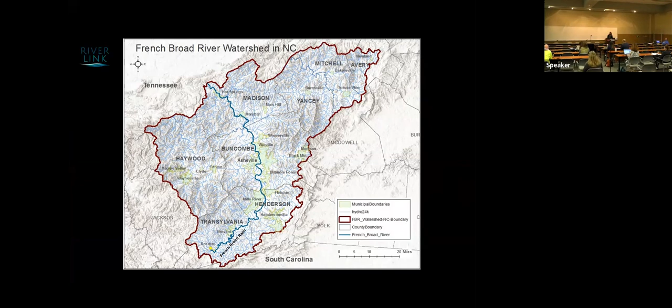A little bit about RiverLink. We're an environmental nonprofit based in Asheville, North Carolina, and our mission is to promote the environmental and economic vitality of the French Broad River Watershed. This is the French Broad River Watershed in North Carolina. It's an 8-county region, and our home base is in Asheville. Most of our work happens in Buncombe County, but technically the French Broad River Watershed is our geographical area of focus.

After a year-long watershed study, we completed the restoration plan in August 2020. There are multiple reasons why RiverLink and our partners decided to focus on this particular watershed in Asheville. There are 3 tributary streams of the French Broad River that flow through this watershed, and they had known water quality issues, including fecal coliform bacteria and other legacy pollutants left over from the industry that used to be built up along the French Broad River.

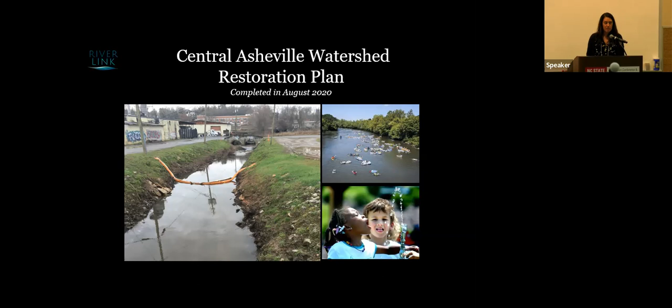So a lot of water quality issues, and marginalized communities that deserve better. We set out to develop this plan to address some of these issues plaguing this area in Asheville.

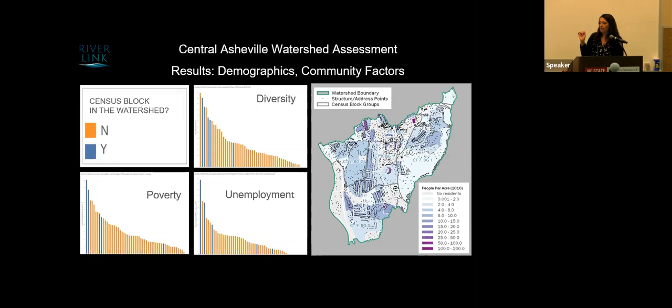So we took that into consideration when developing our project goals. In addition to the typical goal of creating a 9-element watershed restoration plan, we also wanted to really consider the impact of the restoration plan on these underserved communities.

In order to do that, we set out to gather as much community input as we could. We also wanted to help connect communities to the watershed and develop an appreciation of the water resources that most communities are disconnected from. We also wanted to explore green job training opportunities—due to the high levels of unemployment in this watershed, we thought this could be a great opportunity to help with implementation of the plan, and to build a coalition to help us implement it.

So for community input, we did a variety of things. We created a community survey to gather residents' concerns and to learn more about runoff and flooding issues that may be occurring in their neighborhoods. We wanted to reduce the barrier to participation in these surveys, particularly for marginalized communities.

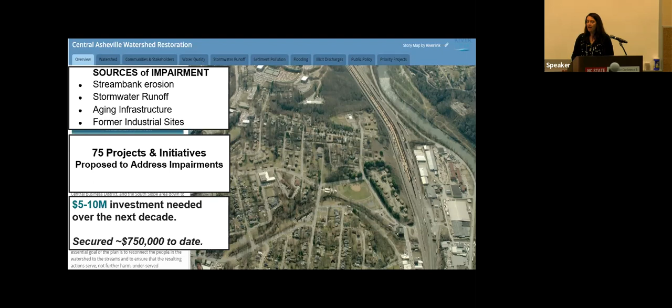After a year-long watershed assessment and community engagement process, we developed the Central Asheville Watershed Restoration Plan. This effort was led by BlueEarth Planning and Engineering. We identified typical sources of impairment in an urban watershed, really nothing surprising there. Out of the plan came 75 projects and initiatives proposed to address these impairments, and we estimate between $5 and $10 million is needed to be invested over the next decade to slow down the degradation of the streams and improve water quality and the ecology of this watershed.

To date, we've secured around $750,000 to implement projects. And if you'd like to explore this watershed plan in greater detail, it lives as an interactive web app on RiverLink's website.

So now I'm going to talk about some of the projects that came out of the plan that are being implemented. I'm not going to go into great detail about each project, but I encourage you to stick around, because my colleagues who are working on implementing these projects are also presenting during this session and the next, and they'll go into greater detail about each of the projects I'm going to discuss.

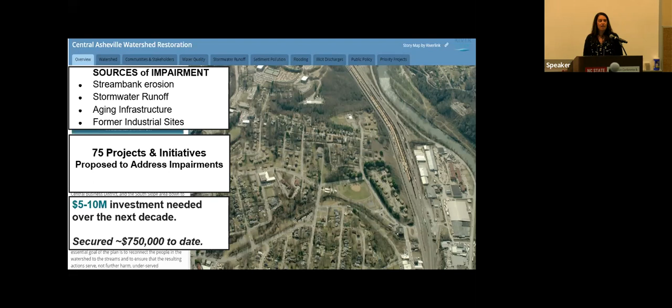So first up is the Southside Community Stormwater Project. As I may have mentioned earlier, the Southside community is in the Central Asheville watershed. It's a historic African-American community that was heavily impacted by the urban renewal program in the 1970s. A lot of Black homeowners and business people lost their homes and businesses under the guise of improving our urban areas.

Many of them were moved into public housing and still live there today. The goals of this project were to improve water quality and habitat in a stream that the community refers to as Nasty Branch, but also address community needs to the extent possible. They're having some runoff issues at a public housing community there in the Southside neighborhood.

One of the goals was to address those runoff issues and then continue building those community partnerships. We were told by residents during our community engagement process for the watershed plan: if you want our input, you need to communicate with us often, communicate clearly, and whatever you do, don't overpromise. People in this community, rightly so, are skeptical of outsiders coming in and saying they're going to make improvements to their community, and it hasn't always gone well for them. So we really tried to keep this advice at the back of our mind.

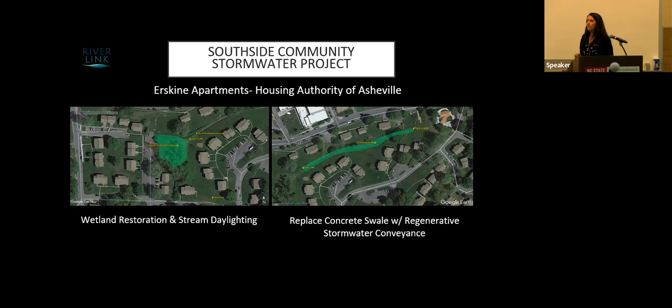In addition to the water quality improvements we were focused on, we also wanted to help address community needs if at all possible. So we looked for areas where our project might overlap amenities that the community wants and needs, if at all possible. Through our stakeholder engagement events, we heard from residents that there's a need for safe walking paths to better connect the apartment buildings to one another. Currently they're dirt paths, and a walking path could directly connect them to their community center, which is across the street from the apartment complex.

We also want to remove a chain link fence that currently bisects the apartment complex and prevents people from moving in a more direct way to one another's apartment buildings. There's nowhere to hang out in the shade, so we're going to construct a shade structure, a safe bike path for kids, a memorial to lost loved ones, and edible plants. We've gotten a foundation grant through the Dogwood Health Trust Fund that's going to help fund the community amenities aspect of the project.

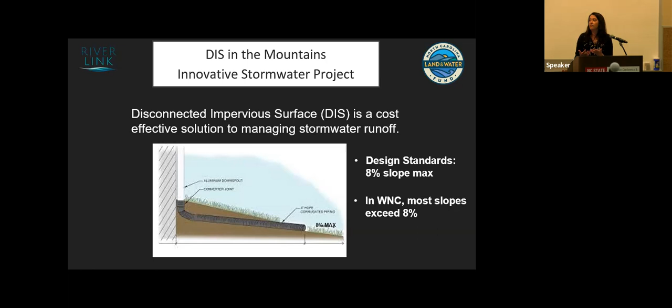That really limits our ability in Western North Carolina to utilize this cost-effective way of dealing with runoff. So this project's goal is to develop designs for DIS on steep slopes - we were looking for slopes greater than 8% - and then research the effectiveness of these designs once the features are constructed. So looking at things like how often do they overflow, what are the infiltration rates like, and then obviously looking for any issues like erosion, since these are being built on steeper slopes.

A really cool aspect of the project is there's a social research component. We're partnering with faculty and a student from Lenoir Rhyne University's Graduate Studies program in Asheville to look at public perceptions of stormwater management. They're going to present on that after my talk, so I encourage you to stick around if you want to learn more about that.

So what have we done so far? We worked with 6 homeowners in the Central Asheville watershed to construct DIS practices on their property. These properties have slopes ranging between 17 and 33%, and they're designed for the 1.5-inch storm. We're very early in the monitoring process, but early results show good infiltration.

This photo was taken in October when they were installed - there are dormant native grasses and wildflowers planted in there. You wouldn't know it by looking at it, but this spring we're really excited to see those plants flush out, and the monitoring will continue. So stay tuned for more information on this.

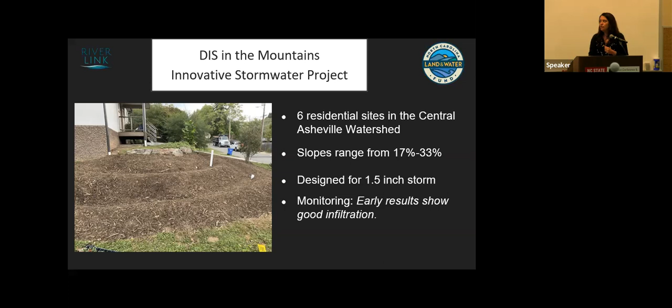And with that, I would like to thank all of our partners and funders. I forgot to mention that the Southside Community Stormwater Project is primarily funded by the Division of Water Resources, the Water Resources Development Grant, as well as the North Carolina Attorney General Environmental Enhancement Grant.

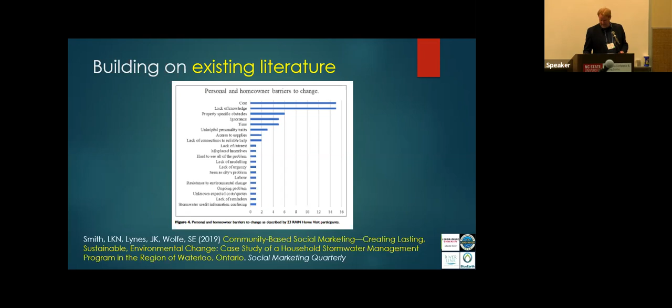We referenced and looked at lots of literature as we went along. One particular study I want to mention is by Kristan Cockerill from Appalachian State University, who does a whole lot of work on stormwater perception. She did a presentation at the Western Piedmont Council of Governments Water Quality Conference along with the Reese Institute last November.

I'm going to share a little bit about some of her findings to connect them with what we're doing. When she asked the question, what does the public think about stormwater, first of all, this isn't a widely studied area. Second, it's complex. And third, context matters critically.

They looked at a very wide-ranging area of Appalachian Mountain communities from New York down to Georgia, with 1,400 respondents, which is much bigger than our sample. So it's good to look back and forth at what they found, and the context of the Central Asheville watershed becomes really critical for what we were looking at.

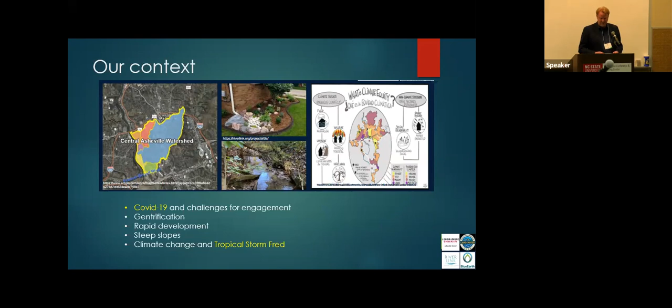COVID-19 is still among us, but it created a challenge for going door to door as we wanted to in some ways, and changed the rules of engagement in a lot of ways. Also, right in the middle of data collection, Tropical Storm Fred hit, and that actually gave us a little bump in people being interested in stormwater issues because they were hearing a lot more about it in the media.

The other thing I want to mention about the context is there's a climate justice and climate equity initiative that the city of Asheville has been engaging in, happening in parallel to what we're doing. We could simultaneously learn from what they're doing and not duplicate it, but they were having a lot of community meetings around what is happening in your community and what we can do about that.

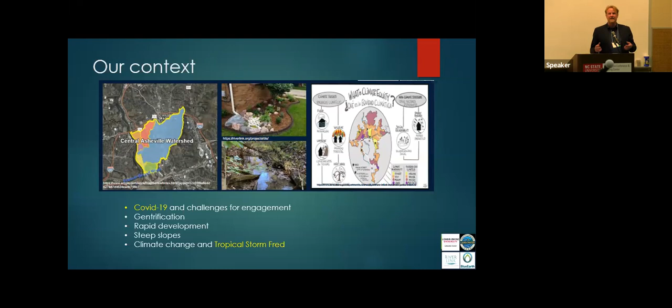Our process involved connecting this to multiple classes that I teach. One is called Environmental Policy. Another is Visions of Sustainable Communities. And another, happening this semester, is Sustainability, Behavior, Education, and Communication.

In these classes, students have been involved in almost all aspects. But more importantly, Reese Fellows, such as Allison, who has done the most of the work here, have been involved in making what we've done what it is right now.

We conducted 15 interviews last spring with community leaders engaged in the community, and they not only told us about what they cared about, but also about how to engage the community more effectively. So it's kind of a strategizing set of interviews.

We also conducted a survey which aimed to tap knowledge, awareness, context, the perceived barriers and benefits that I mentioned, interests people have, and potential action steps. And I'm going to turn things over to Allison Royer, who's going to tell you all about that.

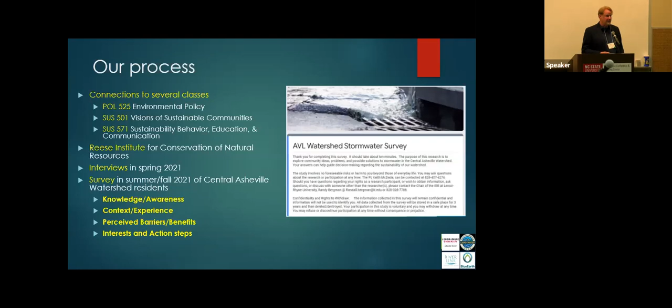So thank you. I'll be back.

We faced several challenges conducting this survey, including reaching a diverse group and getting people interested enough to take the time to complete it. To combat these challenges, we reached out to groups with different backgrounds and offered the survey in Spanish, as well as offering an incentive of raffling off a free rain barrel for anyone who completed the survey. We finished with 87 completed surveys in total to analyze.

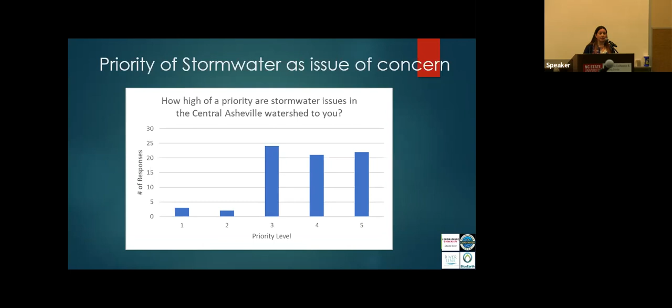When asked how high of a priority are stormwater issues to you in the Central Asheville watershed, the majority of our respondents responded with a priority of 3 or higher. This could show that our sample has a bias for caring about these stormwater issues, which could show that we are engaging these innovators and early adopters according to this diffusion of innovation model developed by Everett Rogers.

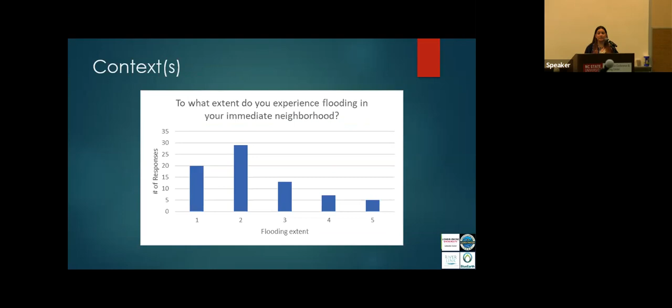When asked to what extent do you experience flooding in your immediate neighborhood, the majority of our respondents marked that they experience flooding to a small extent of 1 or 2. This could mean that flooding happens more downstream from these respondents, and could show that our sample's perception is influenced by a lack of flooding in their immediate surroundings.

Similarly, the majority of our respondents responded that they have 50% or more of their property uncovered by hard, impenetrable surfaces, meaning that there's lots of opportunity for water to soak through the ground on their properties, and also lots of opportunity for DIS to be installed.

When given the chance to respond to a question regarding flooding problems, neighbors were mentioned several times, whether it was water flowing to or from your neighbor's yard, or your yard being fine while your neighbor's property floods. We also found it interesting that several people mentioned puddles that slowly soak through the ground as a problem, when this could actually be seen as a positive thing when done intentionally through DIS.

So clearly our sample has some knowledge of the problems and the causes of stormwater management, but there may be a knowledge gap in the solutions to these problems, such as how to slow it down, soak it up, and keep it clean properly. Keith is now going to explore some of the more specific barriers and benefits from the survey.

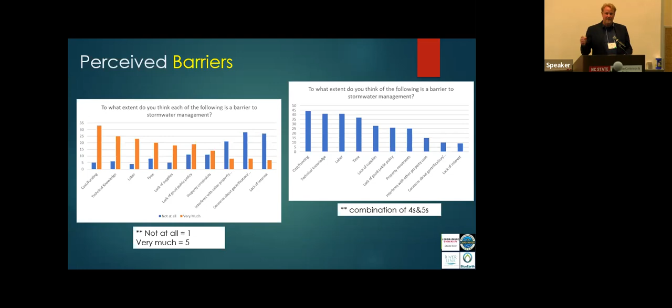So what do you think the perceived barriers are? I already mentioned a few. Similar to the Waterloo, Ontario study, we found that cost and lack of knowledge were the most rated barriers to engaging in these behaviors. And that's really critical because, as Allison mentioned, there's knowledge about the problem, but not knowledge about what to do about the problem. People also did mention labor and time as important factors, and they also really pointed out that it's not the lack of interest that is keeping them from doing this, if you see the far end of that.

We also asked if there are other barriers that people perceive that we didn't list from all of our preparation in developing our survey, and there are two things that I want to point out here.

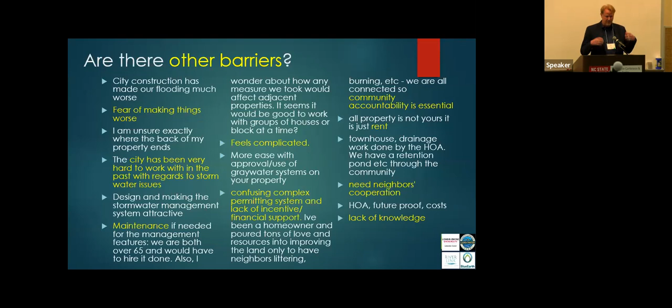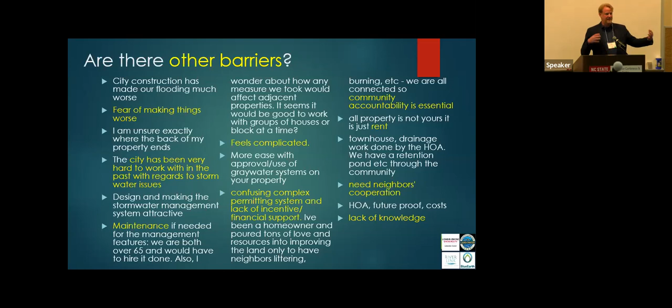There was a pattern of people who were worried about making things worse - not wanting to do something that messes things up. There was also a pattern of responses about working with neighbors in a cooperative way, since they needed assistance because these issues transcend boundary lines. Those were important to recognize and consider.

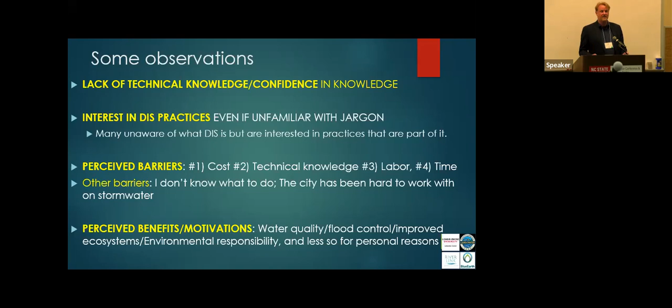So we've got a lack of technical knowledge, or a lack of confidence in the knowledge of what to do, but yet a really strong interest in DIS practices, even without knowing what DIS is. These perceived barriers of cost and technical knowledge, and not knowing what to do, combined with - for early adopters at least - recognizing that people want to take responsible action and protect their water quality.

We also asked about perceived responsibility - who is responsible for managing stormwater practices on private property? What's interesting here is city government and county government got a slightly higher number of respondents saying that's who is responsible. But it turns out most folks said, well, it's us, myself. If you look at the third from the left there - myself, my neighbors, businesses - we're all almost equally responsible for this. The funny thing is nonprofits got the lowest ranking here, yet they're doing the most. That's something to consider.

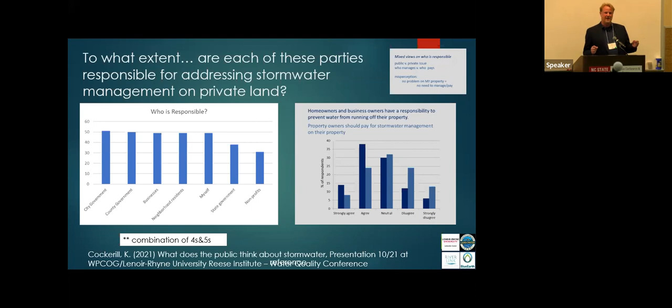Adding on to this - connecting back to Kristen Cockerill's work - she looked at a similar question and found that residents thought residents and businesses were responsible, but also found an additional factor: they weren't equally responsible for paying for it. They were only responsible for doing it. So there's this mismatch between who's responsible for paying and who's responsible for doing. That's a conundrum - something we essentially explored and are considering.

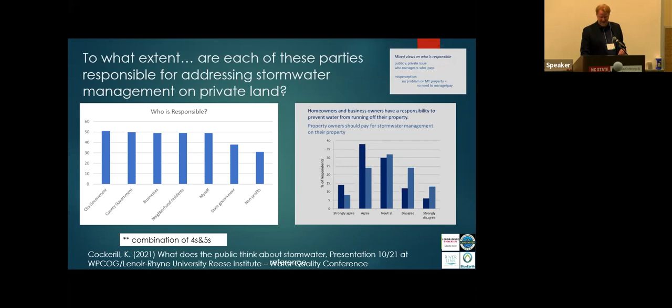In general, there's a perceived responsibility, there's perceived cooperation. Since there's this rather equal sense of responsibility across the various parties, this could mean there's a perceived sense of shared responsibility when it comes to stormwater management. This plus the responses regarding neighbor relations could suggest there's a perceived need of cooperation among groups in order to properly manage these problems. According to our sample, there's not a lack of interest, but rather a lack of knowledge about solutions and how to properly work together across property lines.

So even though it's clear that more knowledge is needed among the community regarding DIS, it is well established among conservation research that knowledge alone will not lead to action. So we will need to do more than just share information.

We are currently using awareness of diffusion of innovation processes by having those six test sites that Renee mentioned, and we held a workshop at one of these test sites to show the community what is happening here. These workshops also open the door for a community influencer to emerge, and increase the observability of these DIS projects by diffusing the idea throughout these neighborhoods and showing the relative advantage of these installations. There's also the potential to create new social norms, which could lead to a new paradigm of human stormwater ecosystems as the ultimate goal.

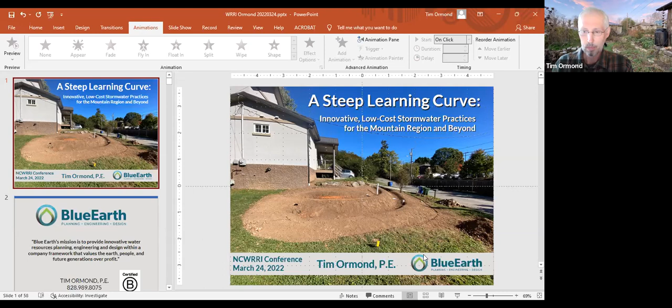I have funding to do CBSM on this topic and we need to collaborate on this. So it's more of a comment. And I should have realized that already had I looked at your outline as one of your session people. I know Marshall's going to get me, but I'm excited about that. So I didn't know you were doing CBSM. Awesome.

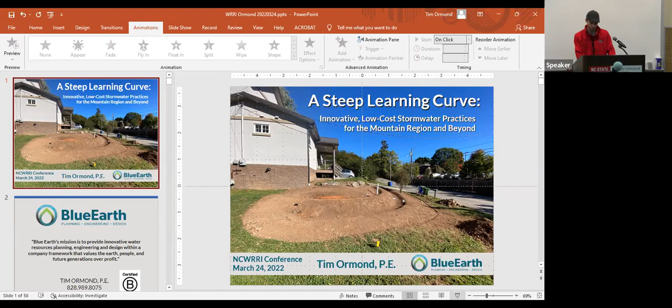Okay, can people hear me? Yeah, sounds good. All right, terrific. Well, thank you. Glad to be here with you all in the form of a hologram. I've never done this before.

I'd like to talk about the innovative stormwater green infrastructure project that Renee referred to called DIS in the Mountains. A quick plug for our company, BlueEarth. We're based in downtown Asheville. We do water resources planning and engineering. We're a mission-driven company, and I think we're the first certified B Corporation in North Carolina that's an engineering firm. There's only a handful around the country.

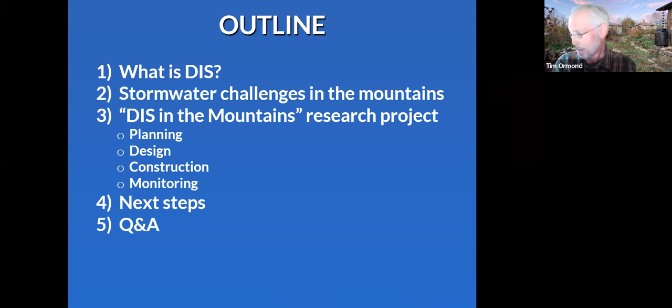So you've heard what DIS is, but I'm still going to mention it, then talk about stormwater challenges in the mountains, our research project, the planning, design, construction, monitoring, next steps, and then have some Q&A. Just setting my timer. So what is DIS? You probably already know that, but it's one more acronym you can add to your collection.

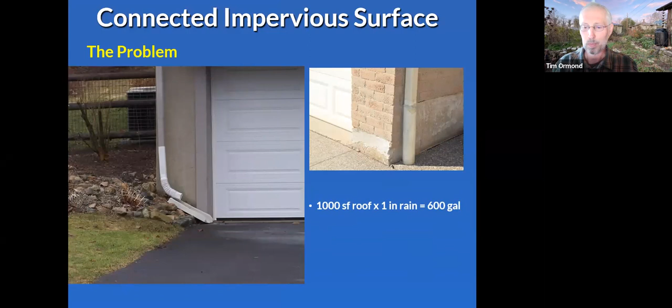It stands for Disconnected Impervious Surface. And the problem is connected impervious surface. So this shows an example of a downspout that's piped to a driveway that goes to a street and a storm sewer system, and then into a creek. Though it may seem like a minor issue, if you take a 1,000 square foot roof, 1 inch of rain,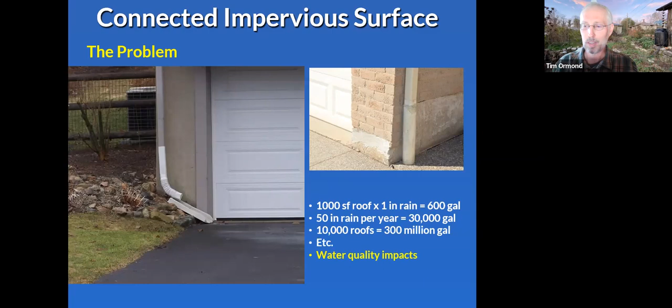you end up with 600 gallons. If you had 50 inches of rain a year, you're dealing with 30,000 gallons. A community with 10,000 roofs, 300 million gallons, etc., like the old shampoo commercials. And when you think about the water quality impacts, they can be very significant when you accumulate that.

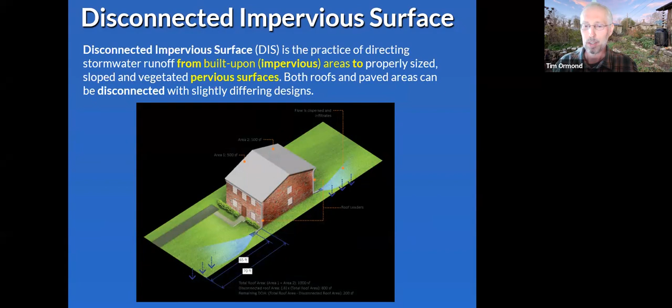So DIS has been mentioned before. This is the long definition, but it's essentially just taking runoff from impervious areas and redirecting it to vegetated pervious areas for infiltration. Fortunately, it's already in the state stormwater manual. It's a low-cost, simple practice. It can be done at the residential scale, DIY, and it has potential widespread application.

And that's really why we're interested in this—we think it's something that, when you accumulate the effect, can really have a great positive impact. Renee showed this diagram already, but essentially you're disconnecting your downspout and redirecting it to a vegetated area. But there are site constraints.

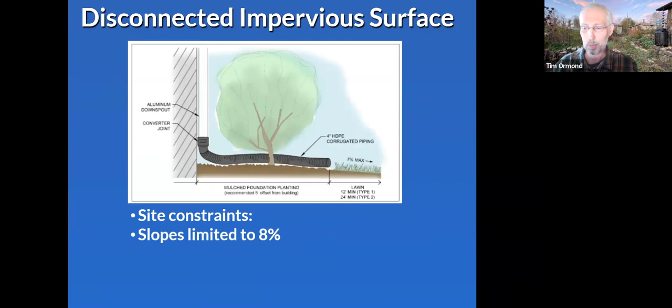Slopes are limited to 8%, unless you have highly pervious soils, then you can increase it. You need sufficient vegetated area for infiltration. And of course, there are limited options in the mountain region.

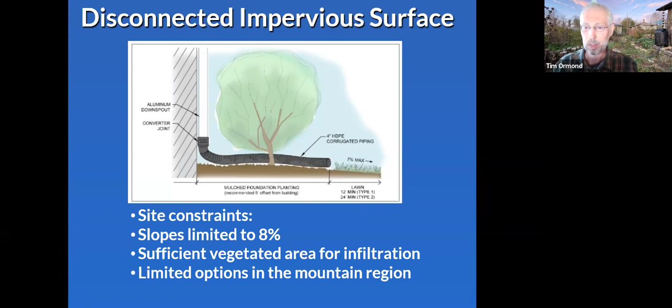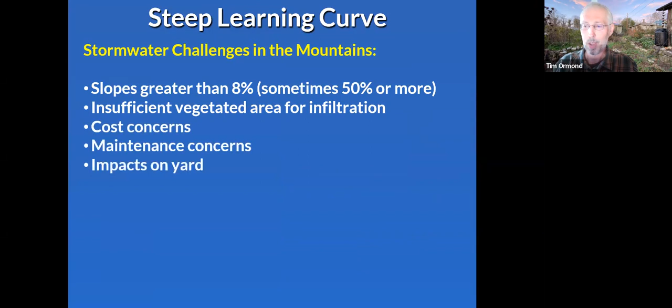So stormwater constraints in the mountains, or challenges—some of them are pretty obvious, in that most of our slopes are greater than 8%. It's hard sometimes to find slopes 8% or less. In fact, we have some sites that are 50% or more. There's insufficient vegetated area for infiltration, cost concerns, maintenance concerns, impacts on yard usability. And it's really not a high priority unless you have some kind of existing problem like a slope failure or flooding.

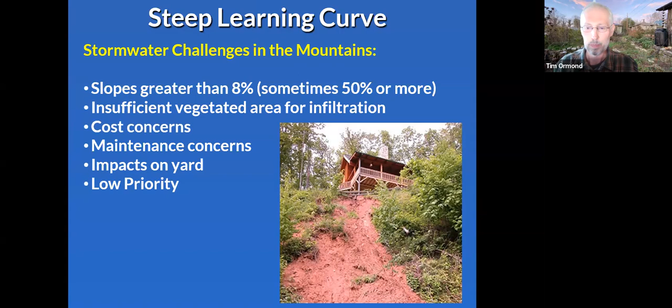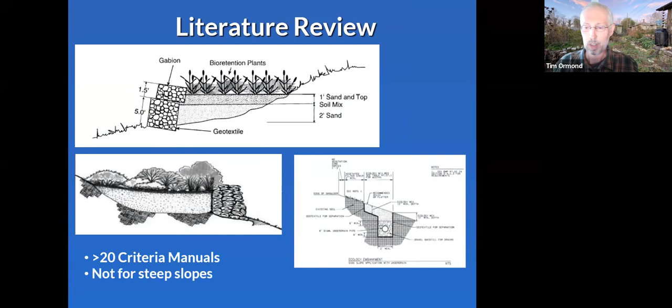We did a literature review looking at different stormwater manuals, over 20 different manuals, and you won't find many stormwater practices for steep slopes unless they involve some special technique such as a retaining wall system.

That piqued my interest about 10 years ago, and I embarked on this research project in Mars Hill, about 20 minutes north of Asheville, the Steep Slope Bioretention Pilot Project, and designed two different terrace bioretention systems using segmental block wall and gabions. We worked with Mars Hill University to do monitoring.

It was a successful research project, but as you can imagine, the cost is fairly high once you're dealing with structures like retaining walls.

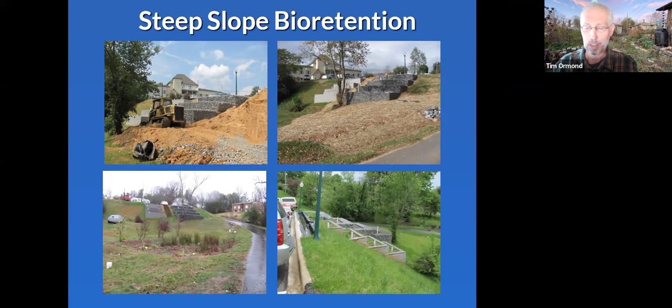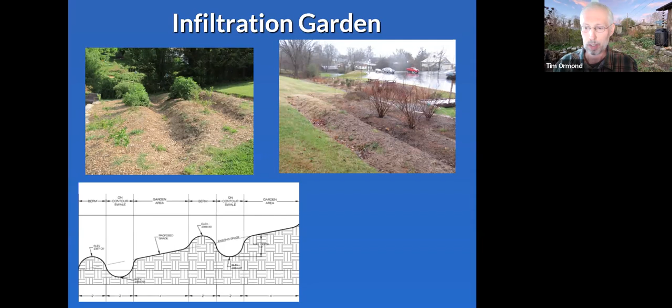We also looked at some simpler, more cost-effective approaches and developed this infiltration garden. It's using permaculture techniques, constructing swales on contour and using the material that's excavated to build berms, basically to intercept the flow coming down a slope. This particular one was on a slope of about 20%.

So I've kind of had this in my back pocket for a number of years. We planted it with elderberries and other native and edible vegetation.

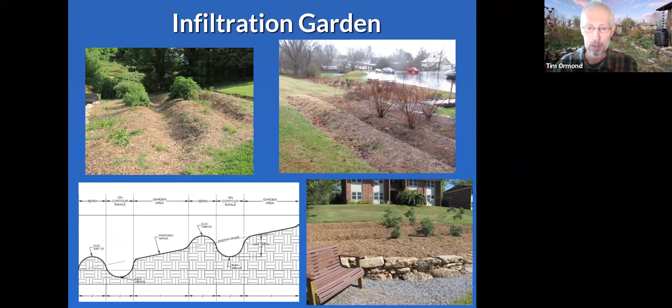And that brings us to the DIS in the Mountains pilot project. The project goal, condensing the words here, was to manage and treat stormwater runoff and then develop DIS techniques for mountain regions, and then, of course, the social research that Keith and Allison just talked about.

I guess you know a lot of this already. It's in the Central Asheville watershed. Our fearless leader has been Renee, RiverLink. Grateful to NC Land and Water Fund and the rest of our team, including Wildlands.

We started with the site selection process, and it started with a remote GIS desktop analysis. We looked at steep slopes and other parameters and narrowed it down to a measly 337 properties, sent out a mailer, got a pretty good response, I think greater than 10%.

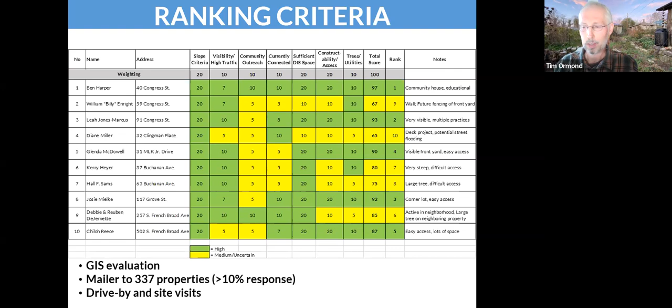Then Renee and I did some drive-bys and site visits. We ended up with a lot more interest than we had budget to fund, but we had this criteria matrix, including slopes, high visibility, constructability, and some other factors, and then ranked the top 10 sites. We picked the top 6, and all of them were willing to participate and signed 10-year agreements.

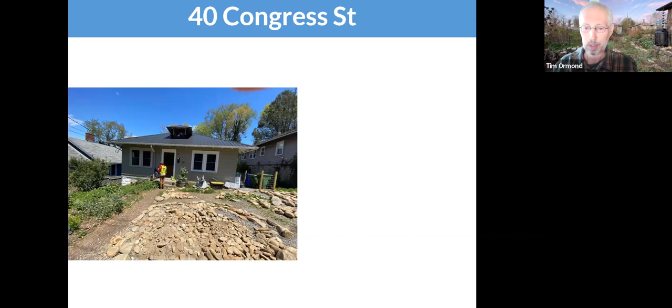I'm going to show you some photos of the different sites. This is an older neighborhood, with homes that were built in the 1920s, some are newer, but basically small lots. Sometimes, runoff goes from one lot to the next.

Here's one site, slope of 33%. This particular site had 3 potential locations. We picked 2 of them. One of them had utility constraints, so we opted not to deal with that.

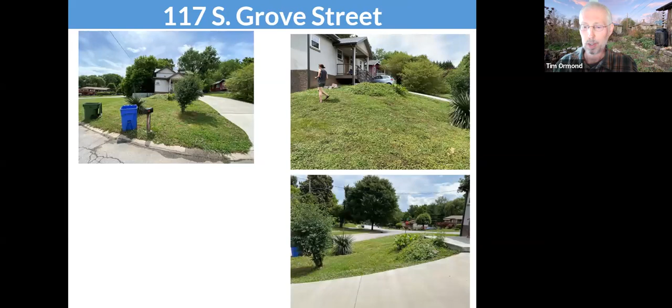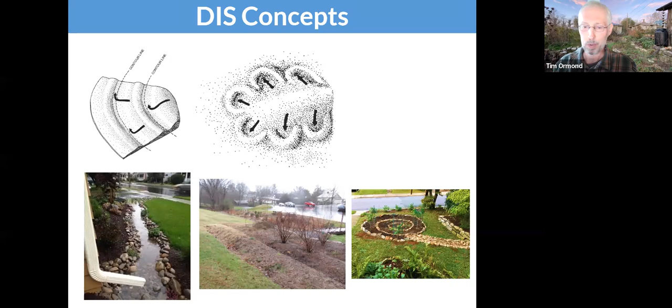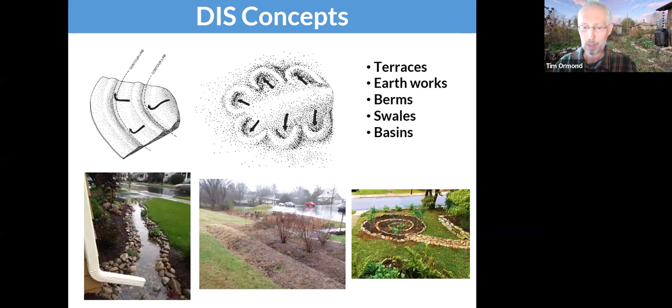So we went through a brainstorming phase, and our drivers were really to come up with reproducible, simple designs. We didn't want to get too complicated. We wanted things that could be effective, but reproducible and even do it yourself. We borrowed from some maybe permaculture thinking in terms of earthworks, which basically means working with the existing earth, doing grading and shaping and using the material on site. From there, we ended up with two basic concept designs: the swale design that I already talked about.

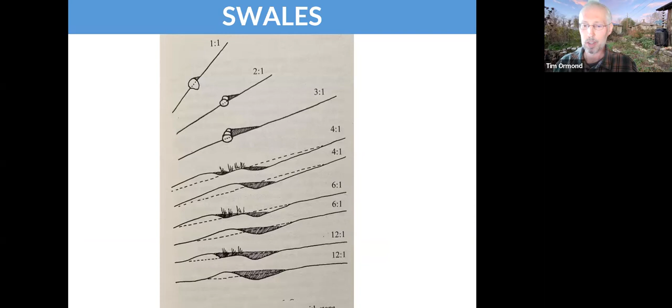And when you get above a slope of greater than about 4:1, you're going to start to need to move into some kind of structural intervention, like a retaining structure or boulders.

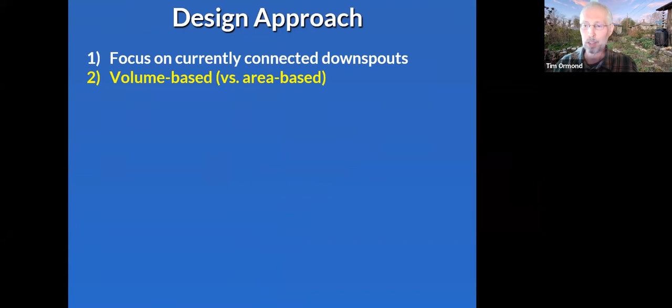So that brings us to design. Some of our key design principles we focused on: currently connected downspouts. This is the biggest one I wanted to bring your attention to, is volume-based versus area-based, and I'll talk a little bit more about this.

As Renee mentioned, our goal was the 1.5 inch storm, because that represents greater than 90% of all storms. And a key constraint is available space.

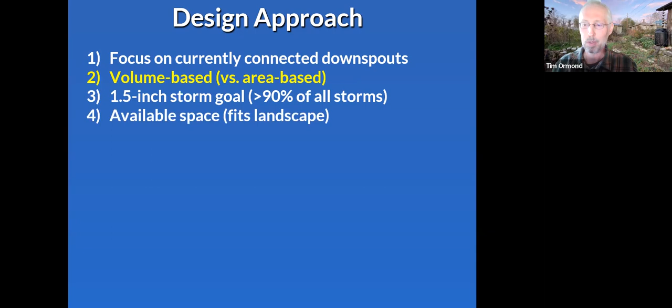We started with a maximum storage depth of 12 inches, but we ended up lower than that. And all of our overflows were through 4-inch diameter PVC risers with atrium grates.

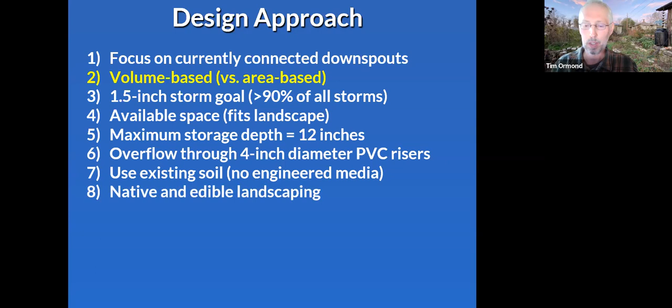We did that because we didn't want to have the risk of spillways, earthen spillways and berms eroding. And this is key as well, is using existing soil, no engineered media. We didn't bring in any underdrain systems, and we worked with native and edible landscaping that was appealing to property owners.

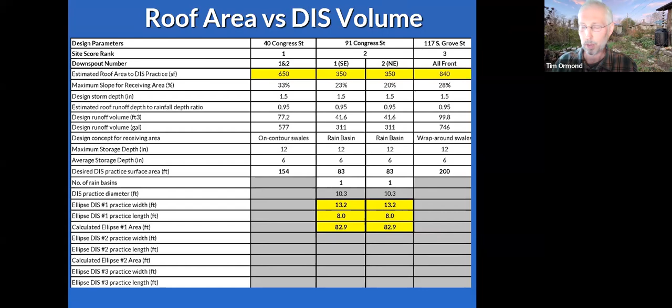This here is just a spreadsheet of sort of the balancing act we had to play. We had the roof areas, the available space, and the volumes we were trying to achieve. And this was one of the tools.

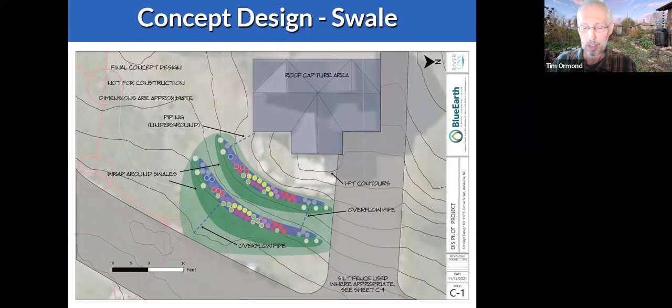From there, we ended up with our concept designs. This is the swale concept design. Basically all the downspouts are piped underground into these swales, and then there's an overflow through the 4-inch riser.

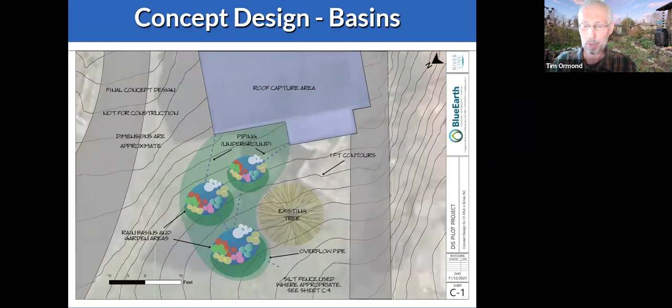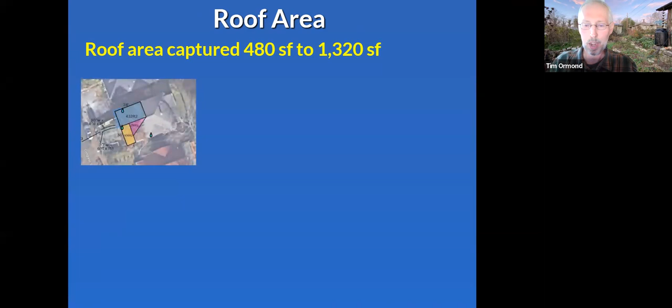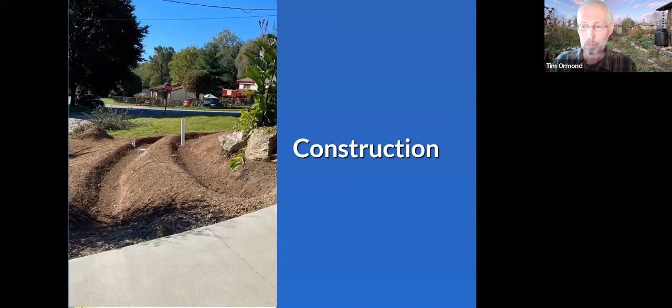That brings us to construction. We constructed a total of 8 rain basins and 4 swales on 6 sites. And the soil was mechanically fluffed, as the contractor called it, to a depth of 12 to 18 inches.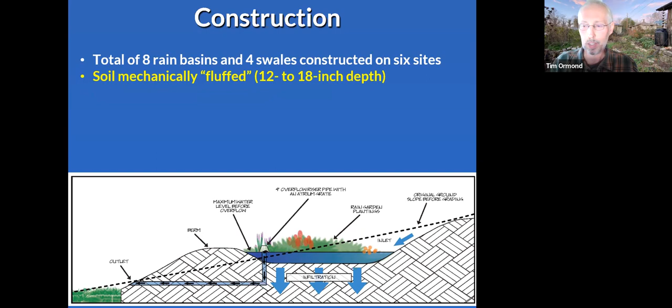And what that showed really is that we could get a lot of infiltration on the site just by working with the existing soil. Total roof area disconnected was over 4,700 square feet.

We compacted earthen berms, and a lot of that was done by hand. And all the downspouts were piped underground. We had a total of 900 plug plants and 14 native plant varieties, a lot of pollinator species.

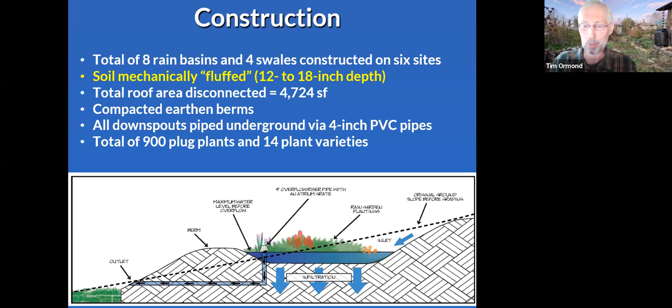We also did some ever-bearing strawberries. We're going to be planting some blueberries on the periphery shortly. That was all done by volunteers. Total construction budget for all the sites was about 22,000, and that includes the monitoring equipment as well as the plantings.

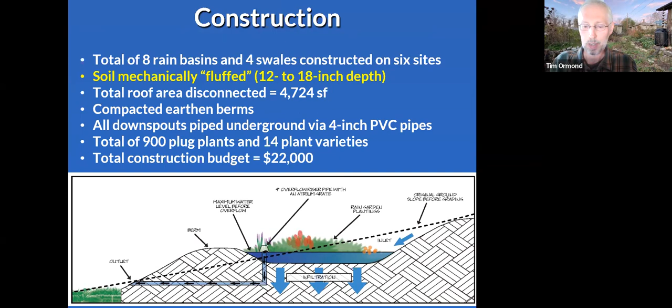Just want to show you some pictures of construction. This one, 40 Congress, is a 2-swale system. And the property owner is kind of a local community activist and very engaged in the project, and built this really nice stone wall to contain the practice.

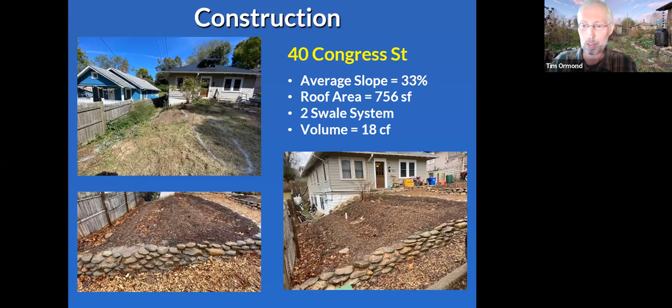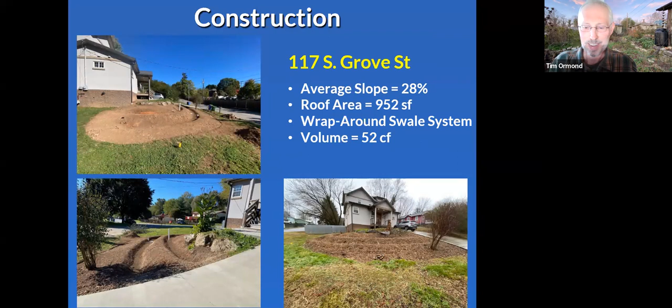This one is a corner lot. We were calling this one a wraparound swale. Renee gets credit for that, she's trademarking it, and it came out really good.

This had a very large front yard, so we did a 3-basin system. We were actually able to divert the entire roof, 1,320 square feet.

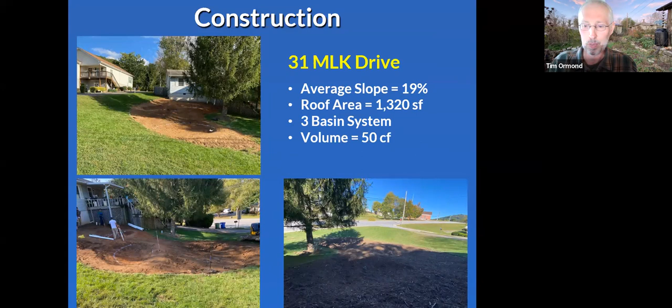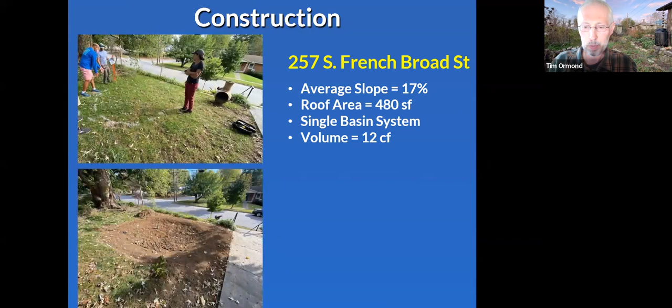To quantify the volumes, we used this 3D scanner application for iPhone 12, which I don't have, but one of the property owners alerted us to this. It's a very handy tool in case you ever want to do some surface characterization, and you can bring it into a program like SketchUp.

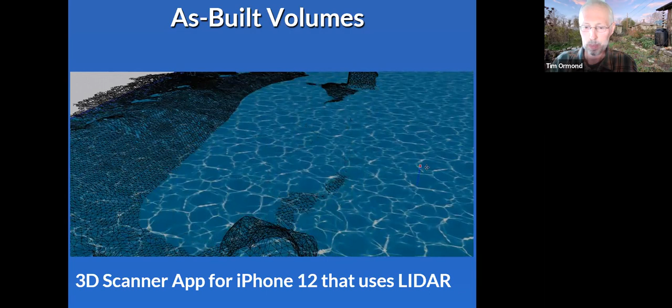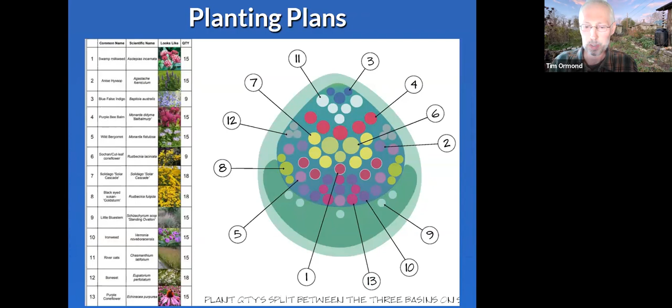We did these planting plans aiming for a lot of different color and biodiversity and 3 or 4 season interest. And RiverLink did these great signs, which are installed, and they have QR codes that link to the project site, so anyone walking by can just link to that and learn more.

Okay, we're now in the monitoring phase. We have a 2-year monitoring period. We're engaging residents to monitor rain and also using a smartphone app.

The inflow is simply the contributing roof area and the rainfall data. For outflow, we're using low-cost vortex meters, about $100 each. The jury is still out on how well they work. We're concerned they might not be capturing the low flows.

We'll be doing infiltration testing of soils and also monitoring slope stability, erosion, vegetation, and maintenance, and evaluating the impact of the range of slopes on DIS practices.

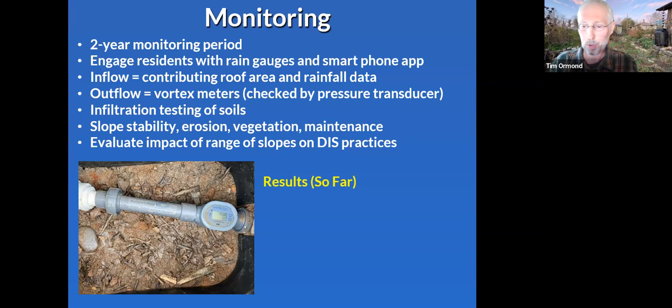The results so far show lots of community interest. We had more people interested than we could implement practices for. Property owners are happy so far.

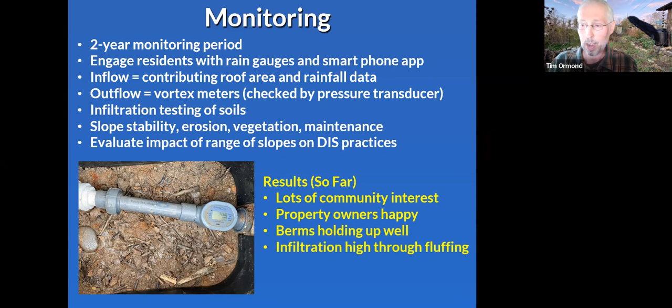Initially, they basically had pits with mulch, and the plantings were done in the fall, so everything was dormant. But as Renee said, we're looking forward to everything coming to life soon. The berms are holding up well. Infiltration has been very high from what we've observed, and the vortex meters, we'll see.

The next steps are completing the monitoring, completing the social research, and spreading the DIS information.

So don't report me to the authorities, but if you do, I'll just tell them about this project.

We're grateful to WRRI for the conference and these other forums. We're going to be presenting at the IECA conference, that's erosion control. For the technical report, you can go to RiverLink's website.

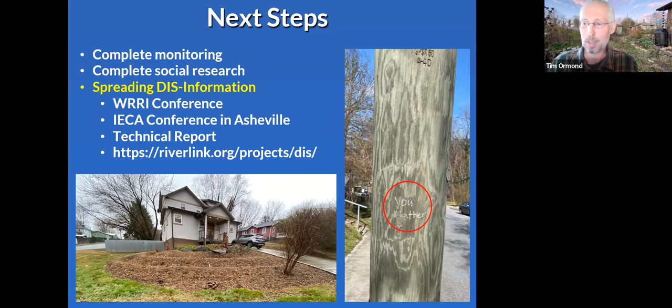Many things I've loved about living in Asheville. I'm holding down the fort here for everybody else. It's got a great community spirit. I just saw this two days ago, that apparently we have roving gangs marking their territory with positive affirmations. I was thinking that for DIS, we might start our own gang and spread the word through graffiti. Renee also had the idea of having matching DIS face tattoos, but we're still thinking about that.